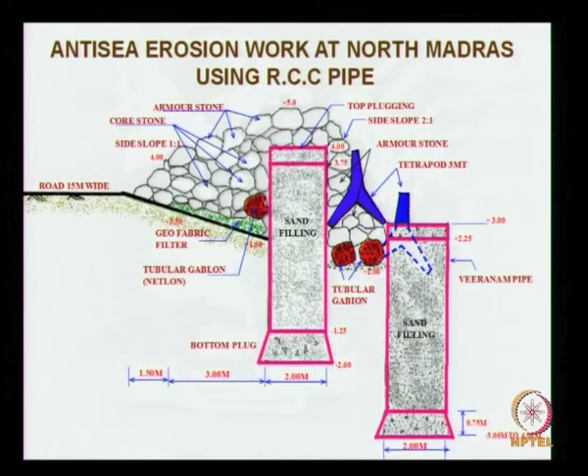This is the kind of cross section which they had adopted for coastal protection, as we discussed in the last class. These are the problems that have taken place due to the severe erosion. Look at this road, which is considered a coastal highway, that has been eroded completely, and because of this you have other problems.

I will come back later to how we restored this coastal highway. Now you see these closer views showing the status sometime around late 2000, not 2019, early 2000 I would say.

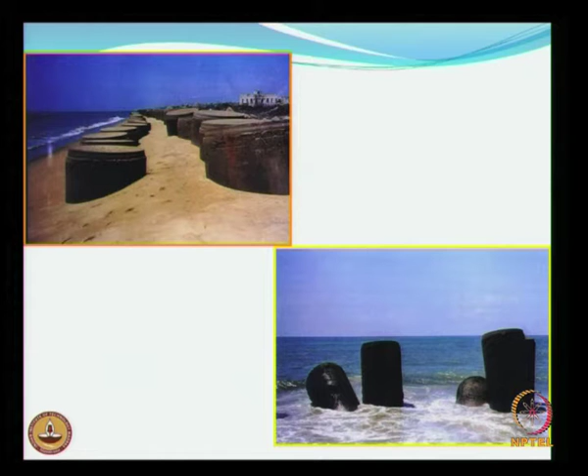This problem has been there for the last 5 decades, nearly. There have been a number of solutions, mostly piecemeal solutions here and there, just dumping of stones etc. Apart from that there were concrete pipes installed as some kind of long term solution, and also sea wall cross sections. All these things really failed.

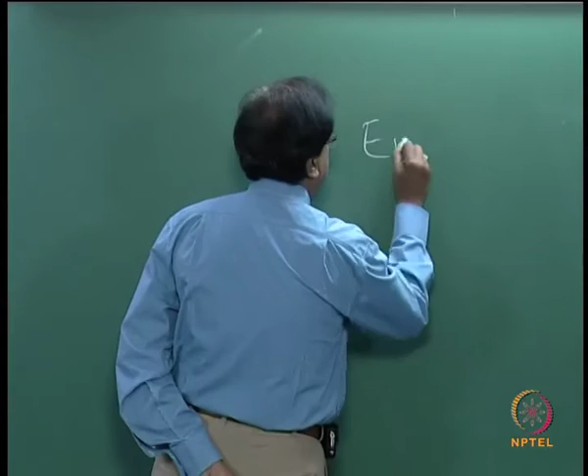This is referred to as Ennore Satellite Port, and it was located such that since it has to take some of the cargo from Chennai port, they decided it has to be as close as possible. But it cannot be very close, so the distance between these two ports is approximately 25 to 30 kilometers.

They sited this, and when they sited it, naturally if you have two ports it has to be connected properly by road, and the only possibility is to connect via the coastal highway. We will come back to this problem of siting of the Ennore port etc. later.

So what happened, this problem of coastal erosion became very important even before the port could get started. Certainly once the port comes into operation, if the connectivity is not there, reaching Ennore port also will be very difficult.

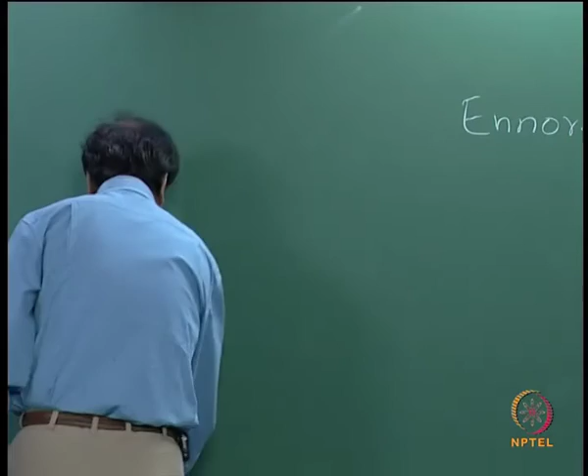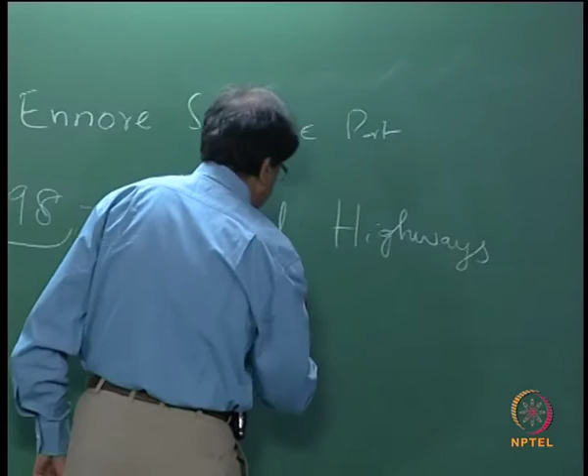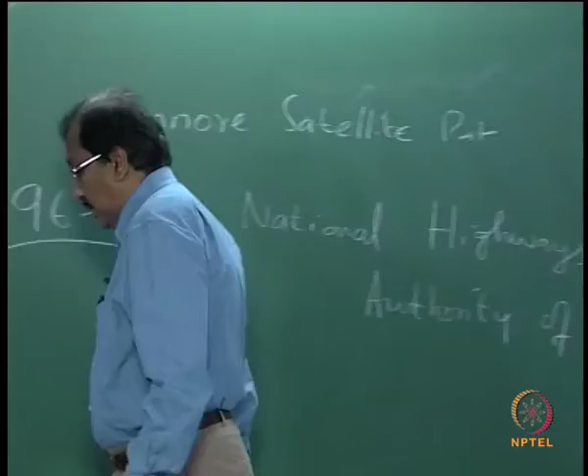So in 1998, or maybe during this time, the National Highways Authority of India referred this problem to our department. They asked us to do the survey, come out with the existing cross section, the status of the coast at that point of time, and then come out with some short term solutions as well as long term solutions.

Now what did we do? In one of the earlier slides I showed you the remains of the shipwreck. From that point we went on to do the survey, and located how much protection was needed, for example here there is not much protection needed. We identified the stretch at every 25 meters interval, surveyed the whole thing, and you see those concrete pipes all over. Here we see the concrete pipes are in horizontal position, and the chainage is also indicated.

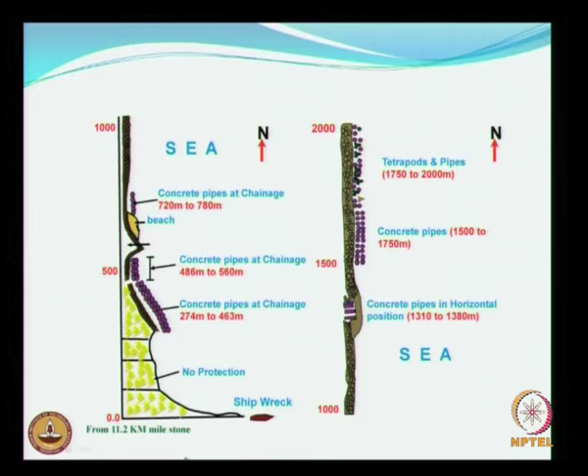So this was the status, and we had to look into the problem of what was happening. So the sea wall that was in existence at certain stretches, we suggested as an immediate step to provide an armor layer of 1.5 ton quarry stones, and as toe protection. This toe protection is very important, and this is the kind of temporary relief so that they can quickly get started with the rehabilitation of the seawall.

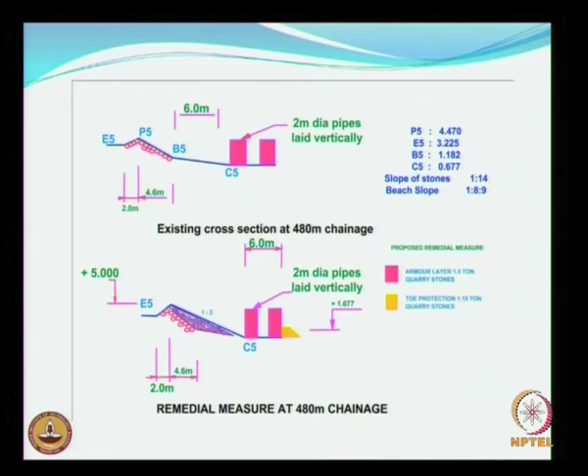At locations where the pipelines were in vertical orientation, wherever they were vertical, we could easily see a lot of scour taking place. In fact, a scour hole was there. So what we suggested is to protect the pipeline, because removing it would be very expensive. So you leave the pipeline as it is, but protect it. But that was never done, so some of those pipelines stood for some time and then collapsed.

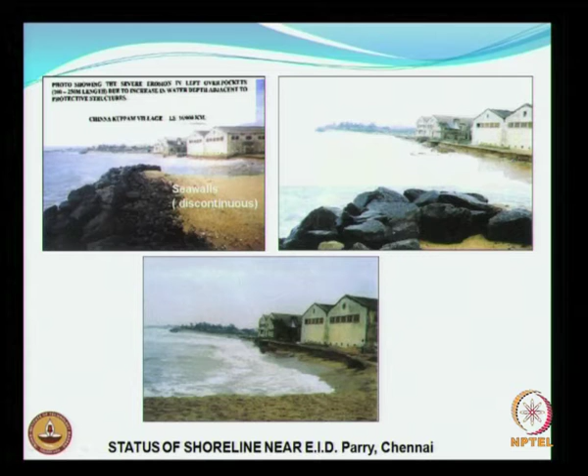So you look at these factory buildings around the same stretch. The factory buildings were also being threatened. So what we did is...

Groin field in the two stretches to be completed by May. We will come back to the groin field later. Monitoring of the shoreline, and if possible sand bypassing from Ennore port or even Chennai port, was included in the initial proposal. Then we had to finalize the orientation, length of the groins, spacing between the groins, etc., through numerical and physical model studies, as well as field studies, because we needed to gather other information about how the process is going on.

And in phase 2 we had also included some long and short groins near Ennore, as well as at the Cooum estuary, Cooum mouth. But I will talk about Cooum mouth later.

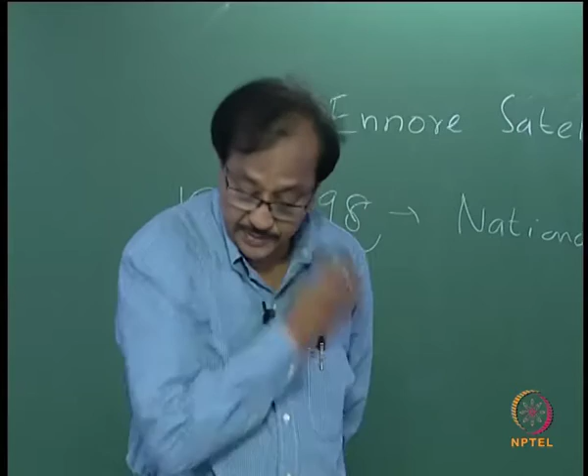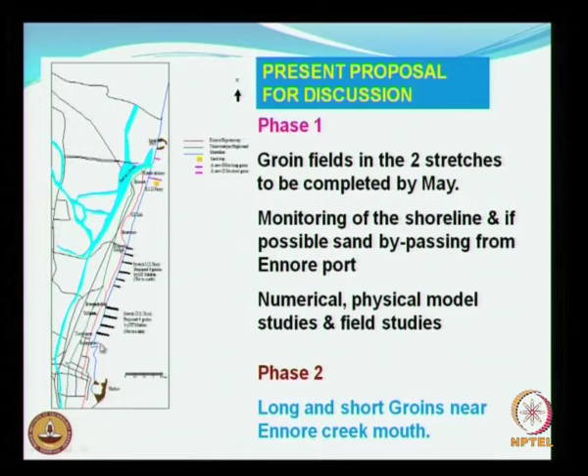So there are two stretches - this is stretch 1 and this is stretch 2. Stretch 1 was about 1.5 kilometers, wherein we had decided for this kind of groin field.

This is the final layout, but before it was decided, we had gone through several trials. When you decide for a groin field, one basic requirement is the groin should extend at least one surf width, maybe about 50-60 meters approximately. When the length of the groin is less, naturally the number of groins will increase - this is very clear.

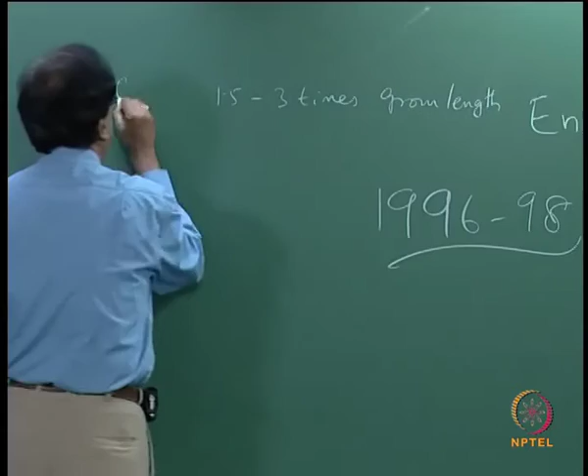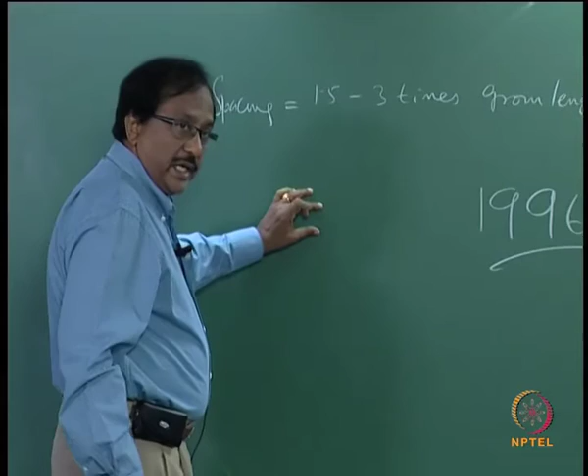So the thumb rule is 1.5 to 3 times groin length for spacing. Naturally, if you use short groins, you will have a number of groins, and if the length of the groin is small, by chance you get the filling up of the beach or advancement of the shoreline - over years this will be only up to about 60 meters.

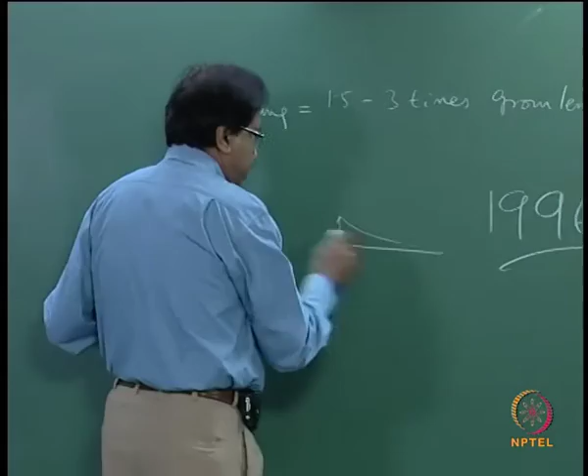But the requirement - they had a requirement that you allow as much beach to be formed as possible. So we also thought of T groins, short groins, long groins, did a lot of calculations, and finally, based on the requirement of the agency, we came out with this kind of cross section, the layout, wherein it is a transition groin, the angle should be approximately 6 degrees.

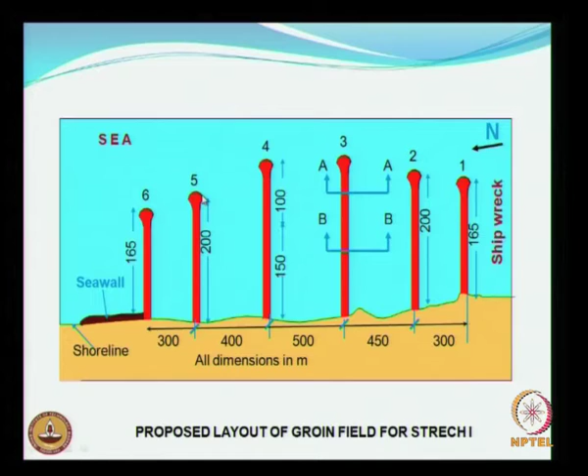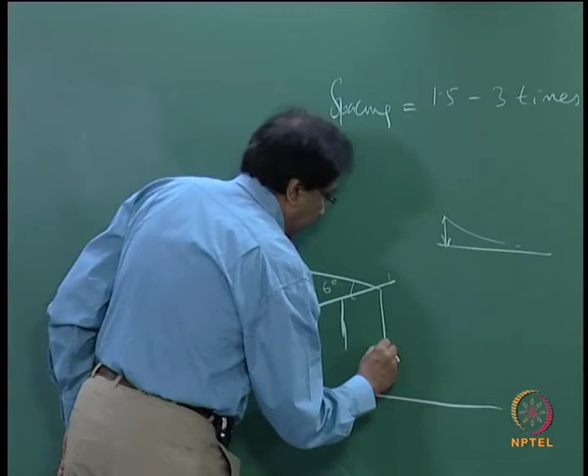So for example, if you have - so this should be approximately 6 degrees. I am talking about these groins, so this is the shoreline and this is the sea, and this angle should be approximately 6 degrees for effectiveness in retaining the sand.

So all these things were taken into account, and then the layout was finalized, but before that I will explain what other trials were also done during the course of my lecture.

Some of the information we needed was to look at how the sediment transport distribution looks like. As I said, the sediment transport is concentrated within the surf zone. So one way of doing it is to calculate the surf width, which is straightforward. How do you calculate the surf width?

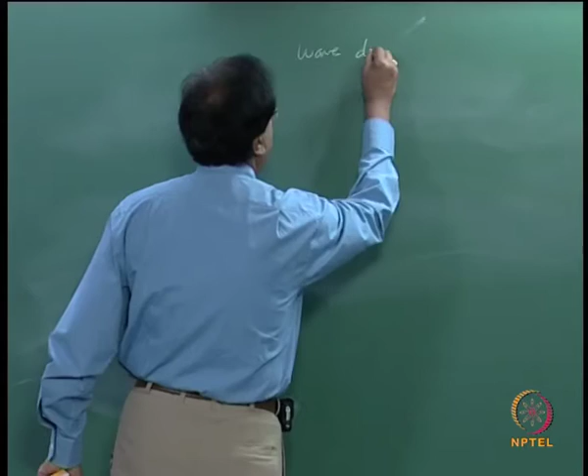What do you need? You need only the breaker depth. Look at the lecture on wave deformation, wherein we have a number of formulas for determining the breaker height or breaker depth. Once you know H naught, T, beach slope, etc., there are a combination of formulas - each formula pertains to some kind of or type of input data you have with you.

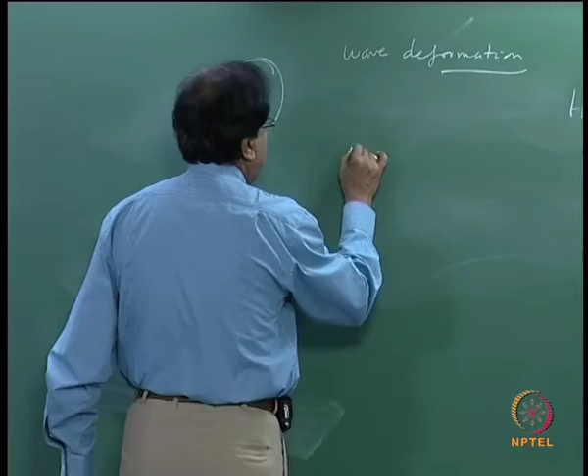So with this it is possible for us to calculate dB. Once you know dB, you can easily calculate the surf width. So beach slope is known. Once you know dB from some of these formulas, then I can get the surf width.

Is surf width a constant? No. How does it vary? Is it the sediment transport? Does it vary every day, every month, or how does it vary?

Anyone? Seasonally, because the wave heights change. No, wave heights change means mean wave heights keep on changing. No, the breaker zone, it is only a zone.

Although we call it a line, when we talk, this is the breaker line we refer to, this is the shore, and we say that this is the breaker line. Although we use that breaker line, it is not strictly a line that can be drawn along the shore, because every now and then the breaking point can change.

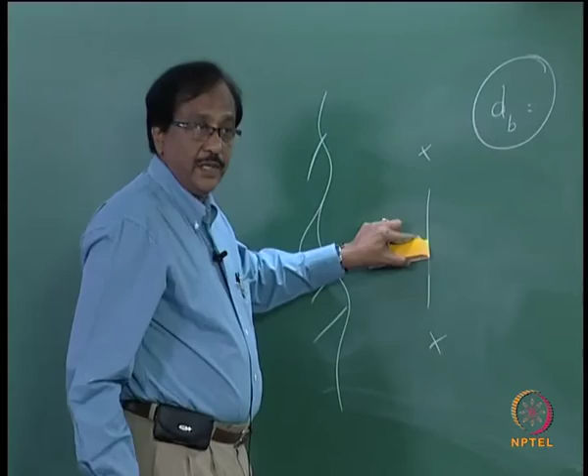But even within a day the breaker line can change, though the change will not be too appreciable within a month or within a particular season. So what you do is every month, from January to December, you can calculate and get my surf width.

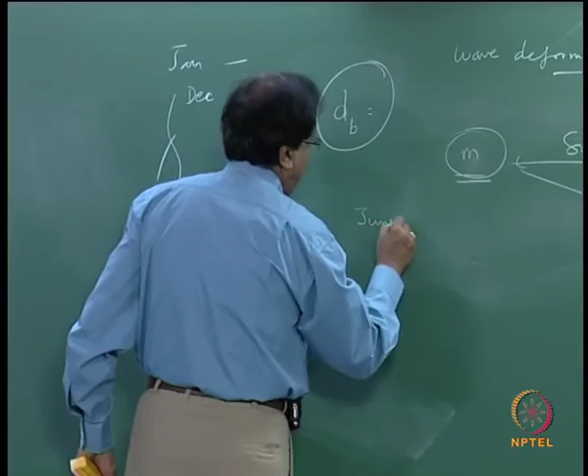But as far as design is concerned, when you want to design a groin field, you have to cater to the maximum sediment transport. So for this coast, it will be around June to August along the east coast of India, where you have maximum sediment transport.

So the surf width also will be higher. So I have determined the maximum surf width. So the groin length should definitely be greater than this maximum surf width, for the simple reason that it can retain all the sand.

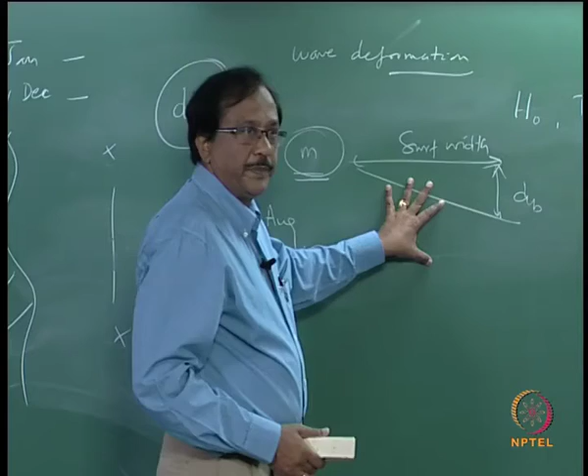That is one way of doing it. I can simply get my maximum surf width once I know the breaking wave characteristics. Based on this, the length of the groin is fixed.

The other way of doing it, you are supposed to go a bit deeper into the problem. Within the surf zone, how does the sand look like? How does the sand transport look like? What is the distribution of the sand like?

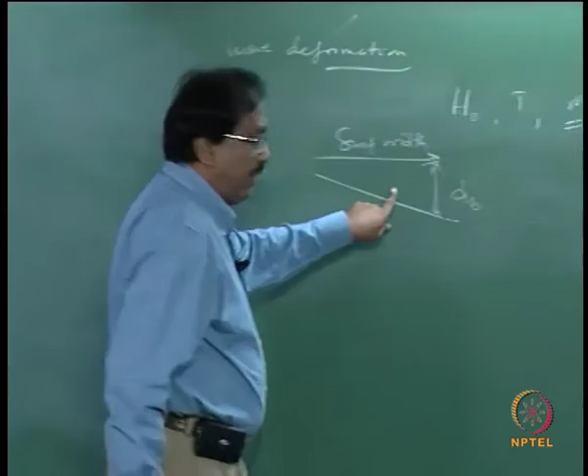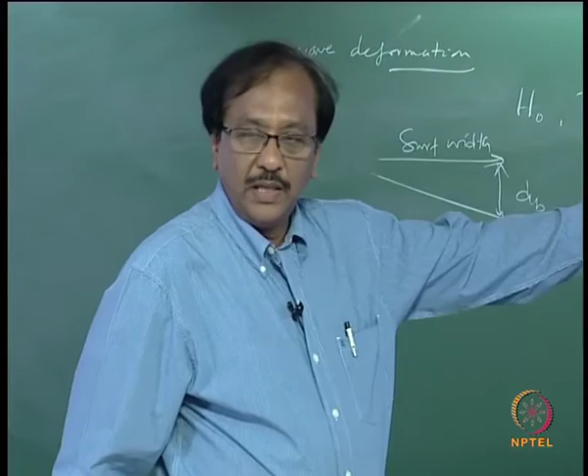So now I have oriented my lecture in such a way that you are exposed to the field problems, and after the lecture you know why you are doing it, when I take up the problem or formulas concerning sediment transport distribution or longshore sediment transport rate, etc. Instead of starting with the problem directly, I started with the actual field problems, and then I will slowly get into how to calculate all these things.

So we did the seasonal sediment transport, which gave us some indications: even up to about 200 meters we do have some amount of sand being distributed. So by having a shorter groin we will be allowing certain sand to be moved. So we wanted to be kind of greedy to trap whatever sand is moving.

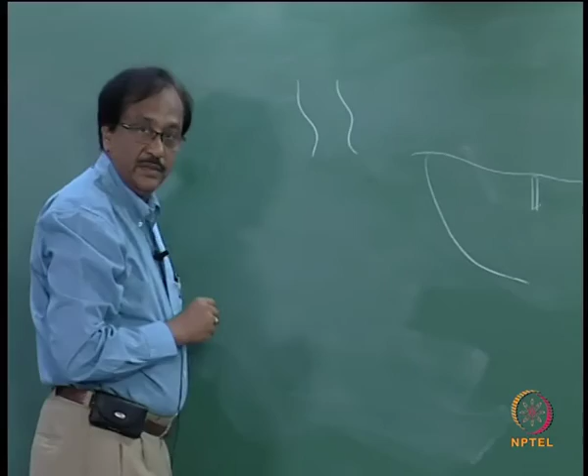But now let us come back to this problem. This is the Chennai harbour, you have the Kuam mouth, Cooum river, and the wave is moving in this direction, for which tranquility is given by this breakwater. Now I have one more river as we have seen, and another breakwater here. This is Ennur, this is Chennai.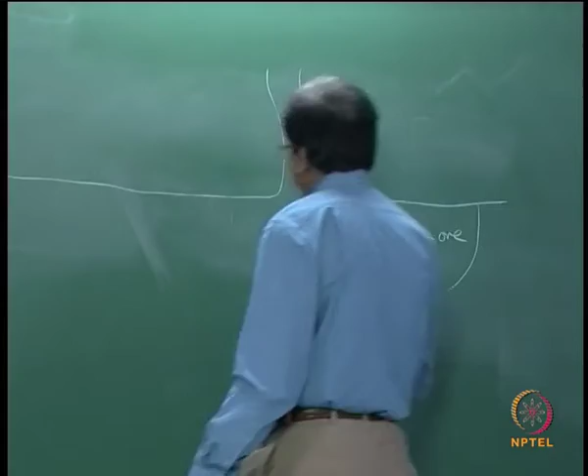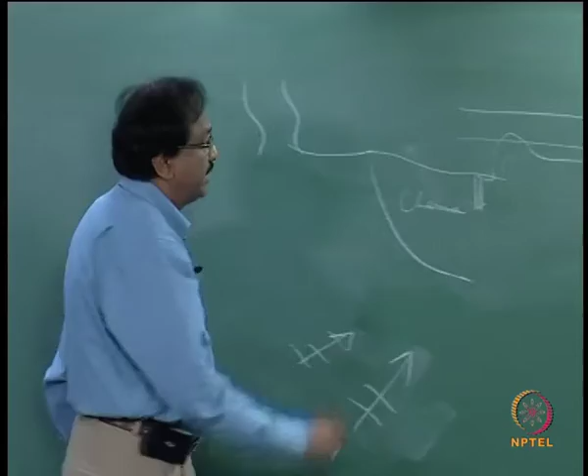How was this coast looking like? The coast was looking something like this, and the road was going something like this. So this is the road, and in fact this should go something like this.

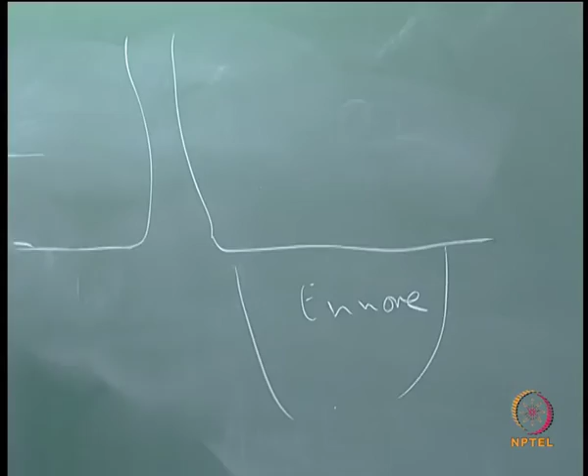So now the suggestion was to have a groin field here. When this proposal was made, arriving at the solution and proving its validity was much easier than convincing the authorities and other experts.

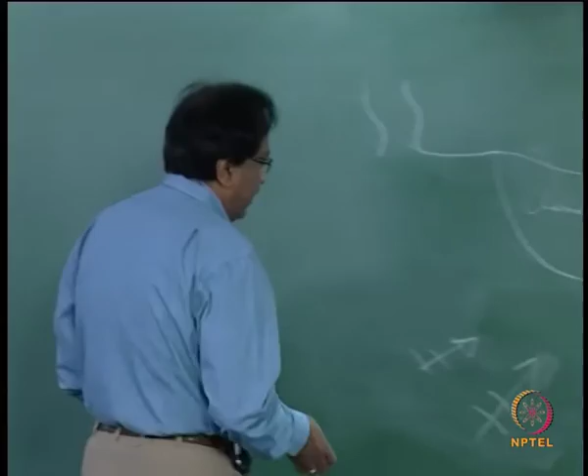The simple problem is why there was objection. When the sand is moving in this direction, most of the sand is trapped here, and this is also an eroding area, and the sand is already moving from here. And when you want to have groins, where do you get the sand from?

So the doubt raised was, is it reasonable or not? It was quite reasonable, right? So where are you going to get the sand? So this problem was raised all over.

Although we came up with the solution in 1997, I would guess, the project had to wait for about 6-7 years to get implemented, because this is an important location and a huge amount of money is also involved.

But then what was the kind of question posed by us? We said that this is stopped, okay, but still the process of the waves, the oblique wave attack, is going to continue here, and this is certainly going to have longshore currents.

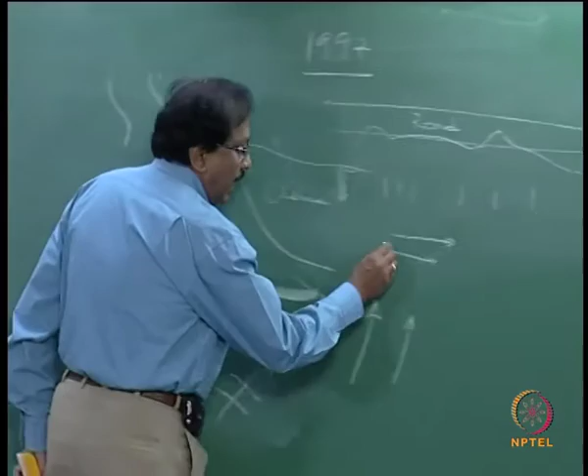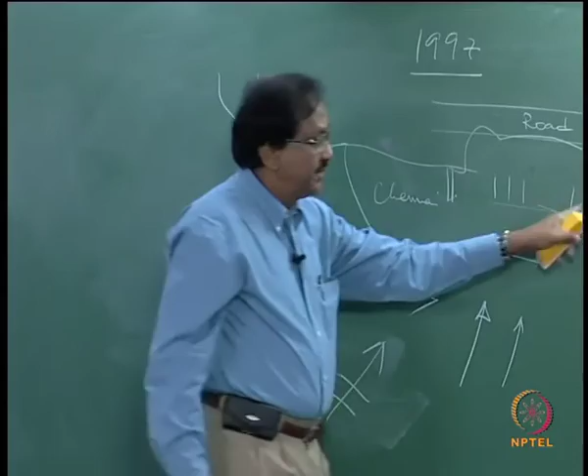And it is going to take the sand. If you do not have these compartments to intercept the free movement of sand, the sand certainly will go there. The sand that is likely to go there, only that sand is being trapped in between these groins, but still the sand beyond this groin area will still have its path to move into this area and create problems here.

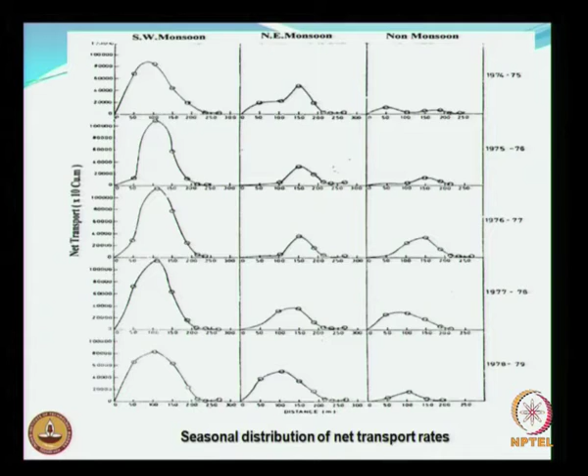Okay, so this was an interesting problem, so we could do that, and then we could convince the authorities, and finally we will see the results later. When we started the work, we tried T groins. T groins, you know why T groins are suggested. T groins are to retain the sand when it is trying to be brought or trying to be taken away into the ocean during the downwash.

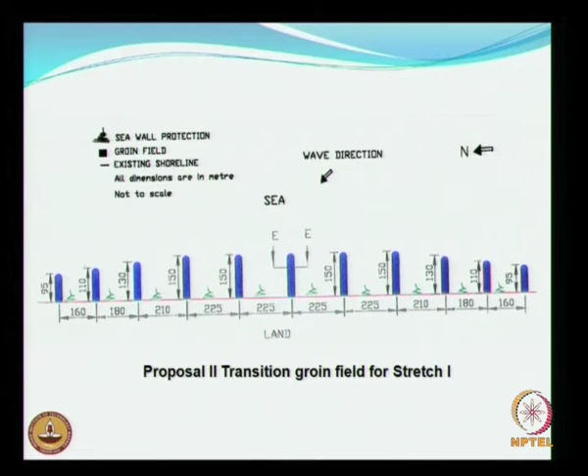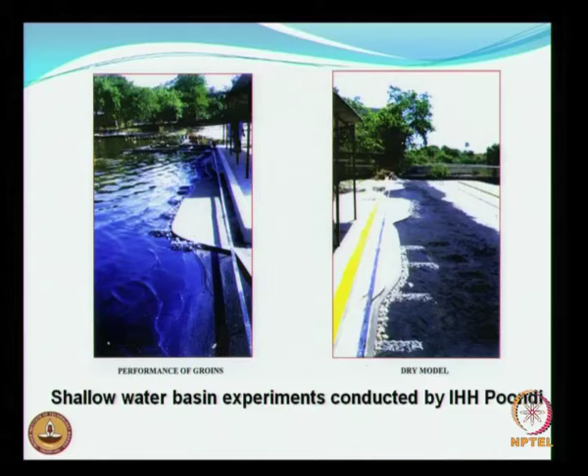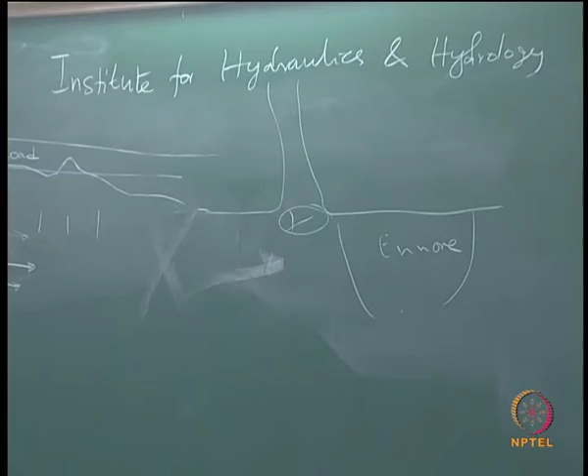So then finally we did, this is a very old project wherein we did the numerical simulation of the shoreline evolution. We have now a better way of projecting all these things, and then we also did the experiments at the Institute for Hydraulics and Hydrology. There is one institute which is about 1.5 hours' drive from our institute. So they have a shallow water basin wherein we simulated all these informations into the wave basin.

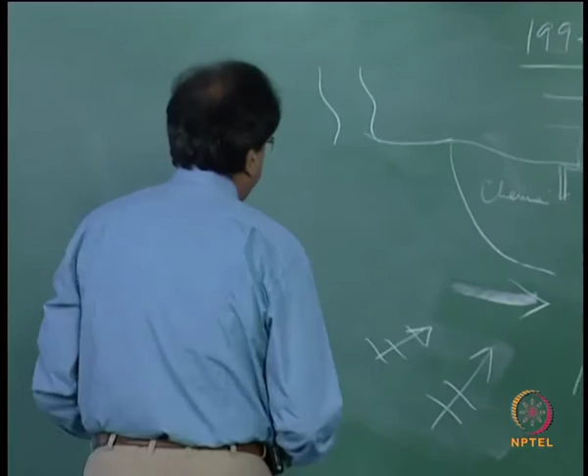And we tried, an attempt was made to consider a mobile bed, that is the sand was also used. Okay, although it cannot be said that we could achieve 1:1 correspondence between the field and the lab, at least we could make some progress in that direction, and that gave us great confidence that the system is going to work.

So, after convincing all the authorities, groin field for stretch 1 started sometime in April 2004, I would guess. So in April 2004 the construction sequence also was given.

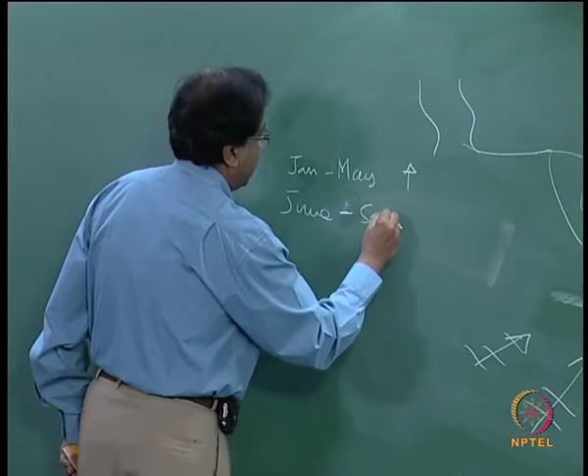Please recollect that the sand movement is: during January to May it is moving towards north, June to September it moves towards north, and October to December it moves south.

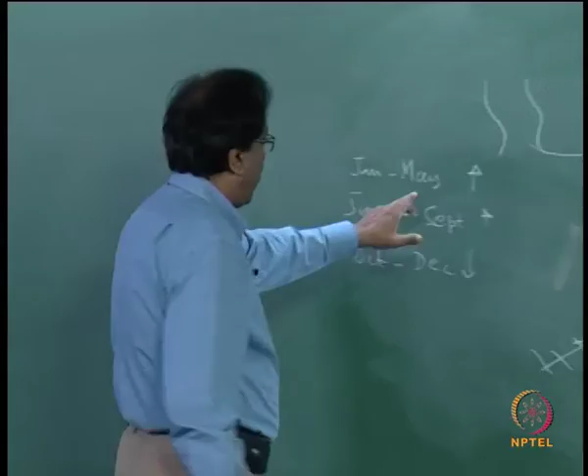How do you know all these things about the direction as well as the quantity? That will work out as a problem later. By then you would know why you are doing all these problems. Is that clear?

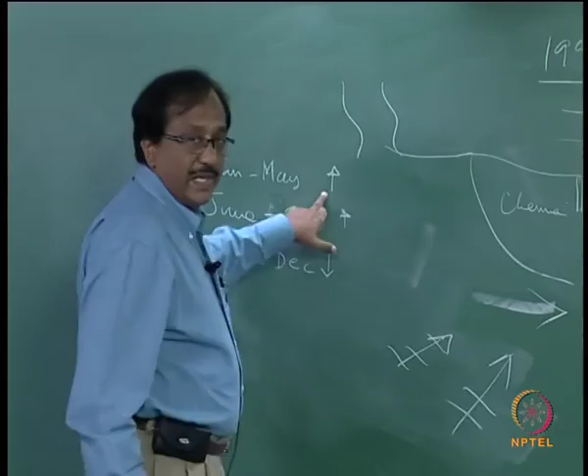So now, the project started in the month of April. When they want to do the project in the month of April, which is the groin you would suggest to be constructed first out of these 6 groins?

Make a guess, at least with whatever knowledge you have gained, just think and tell me. Groin 6, because I have already indicated here, or I have already told. Now the question is, instead of constructing groin 6, what would have happened if I had constructed groin 1? The erosion will take place on the northern side. So what we had suggested is, you construct this groin first and then slowly go ahead with other groins.

But while doing it, make sure that this is properly protected by a seawall. There was a seawall which was in existence, but that had to be modified so as to take care of the action of waves. You understood? So the seawall was first strengthened and then this was constructed. As far as coastal engineering is concerned, the sequence of construction is extremely important.

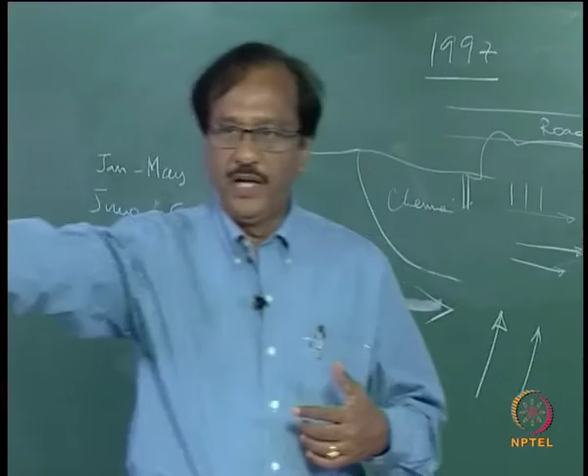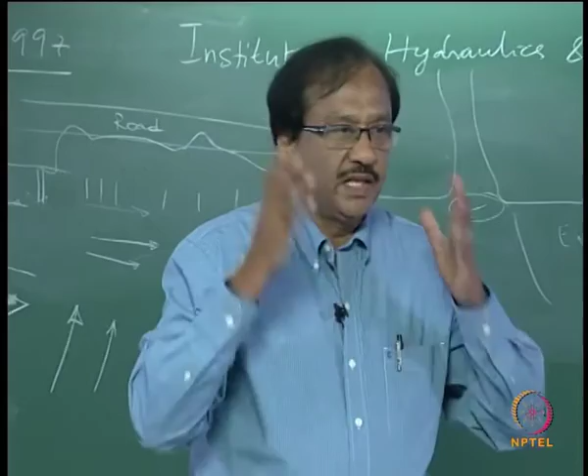And if someone comes and tells that my numerical model is like this and my field is behaving like this in coastal engineering, and what is the deviation, if he says the deviation is less than 5%, it is quite hard to believe. If someone says that it is less than 20%, I would gladly accept. You understood? So even getting up to a deviation of 20% is not so easy, because there are so many ifs and buts.

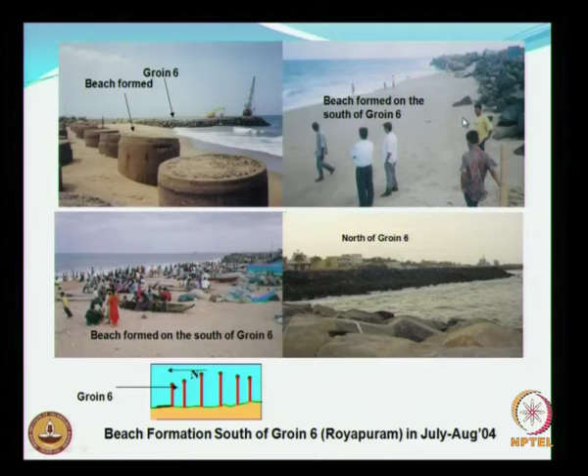Is that clear? So now you see what has happened to all this beach formation. So, any coastal engineering project of this nature, continuous monitoring is extremely important.

I am sure some of you might be joining some consultancy firm or maybe some firm involved in construction, etc. All these things you have to keep in mind.

These are some of the issues being faced by some industries working in this area.

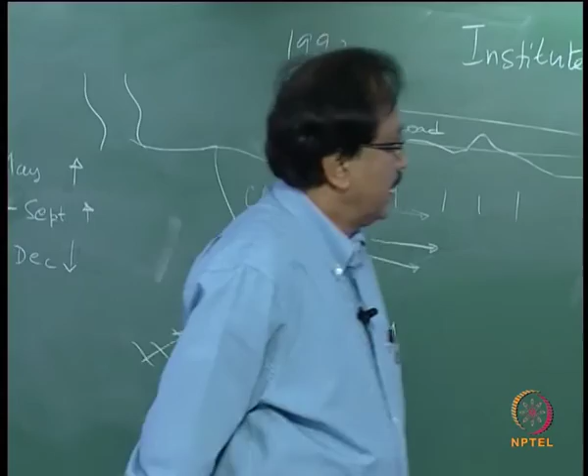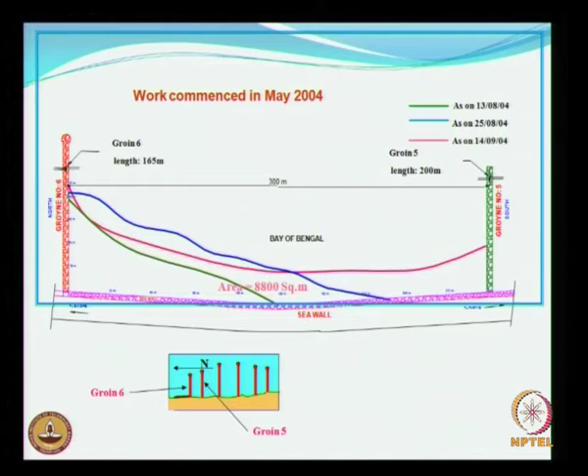But by 6th January 2005, around 9,000 square meters was reduced by about 50%, so 50% of the beach that was found went into the ocean.

Can you guess why? Reduction of littoral. Huh? Change in reduction of littoral. Can anyone?

What happened in 2004? So last week of December 2004 we had the tsunami, and one of the devastating effects was to remove the beautifully formed beach.

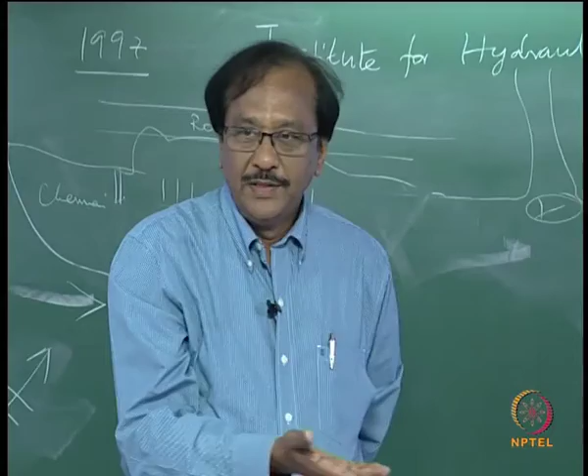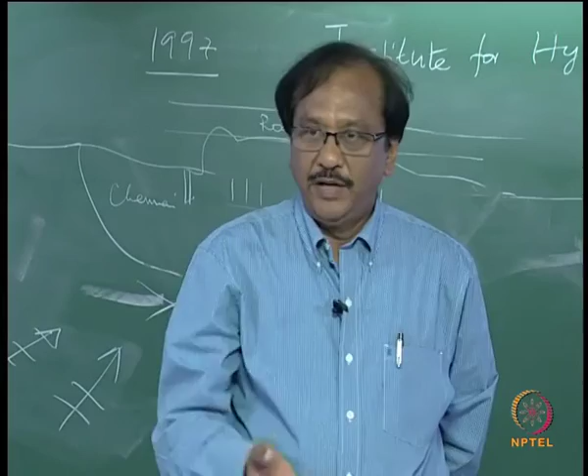That was really disgusting, because we were so happy with the solution being worked out, getting fruitful results after 5 decades. The beach was being formed, the local people were very happy, and we as consultants were also very happy. Suddenly, within a matter of 6 months from implementation, the sand had gone inside.

That resulted in some kind of frustration, but then we continued monitoring the shoreline, and we saw that whatever went inside the ocean had come back with an additional 1000 square meters.

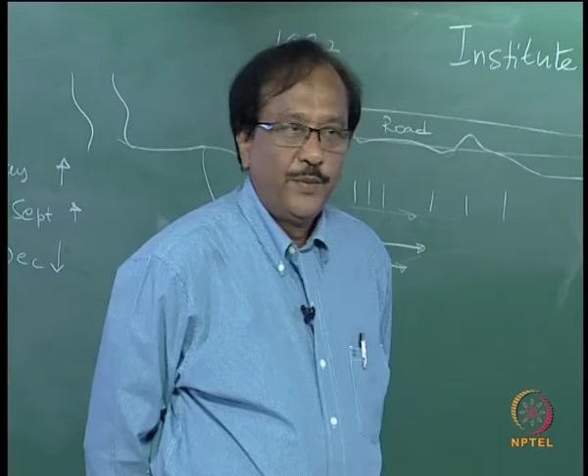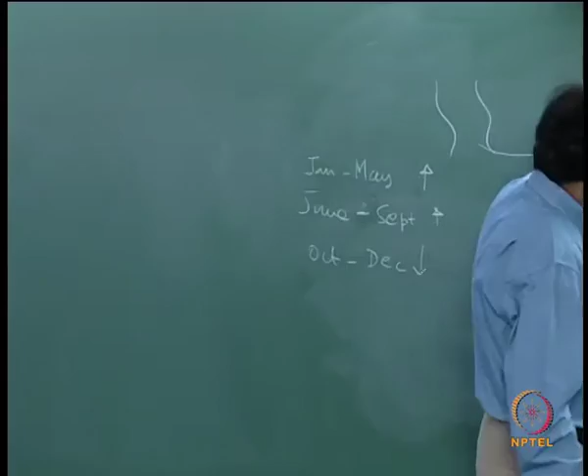What happened? The sand which was removed from here, somewhere here, must have got deposited here.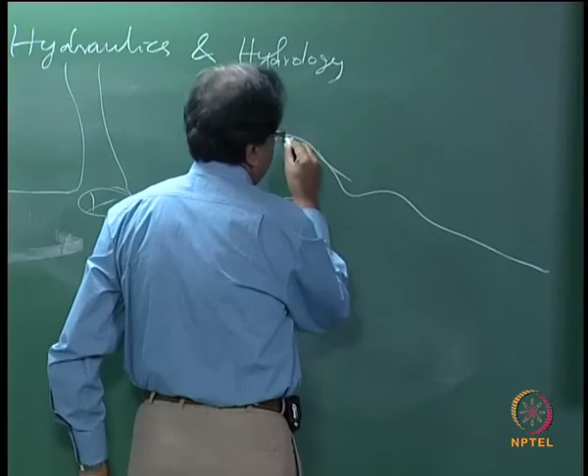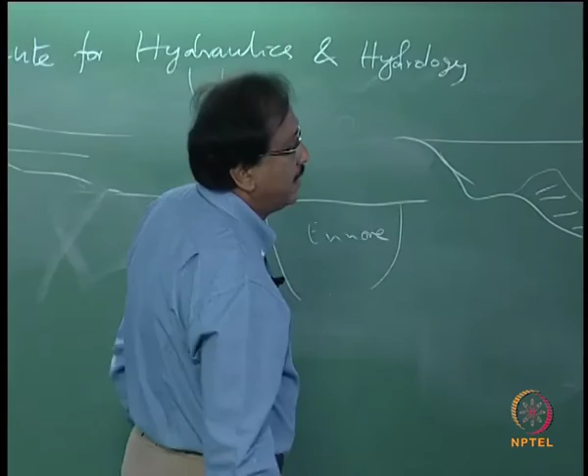So when I draw here, all the sand might have formed here, and then over time - not slowly, actually quite fast - within a few weeks the water level must have gone down, and this bar has been removed and redeposited here.

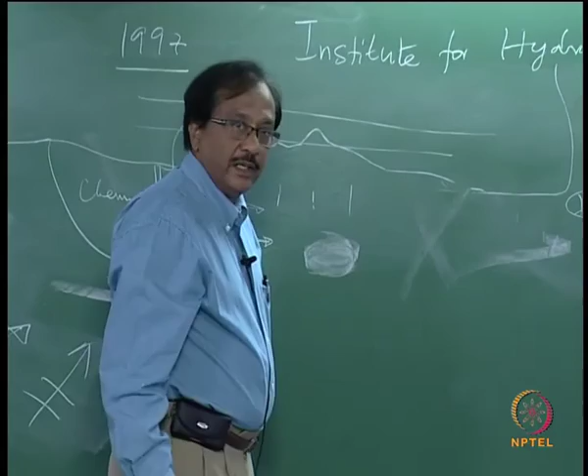Now the beach is intact, as of today. The groin field has been quite effective, as of today, March 2012.

The only thing is, care has to be taken for continuous rehabilitation of the groins, because these groins are formed only by dumping of stones. So you need to monitor and keep rehabilitating if it suffers any kind of damage.

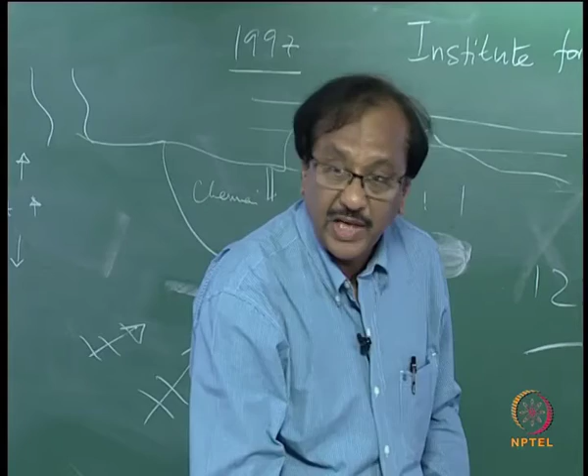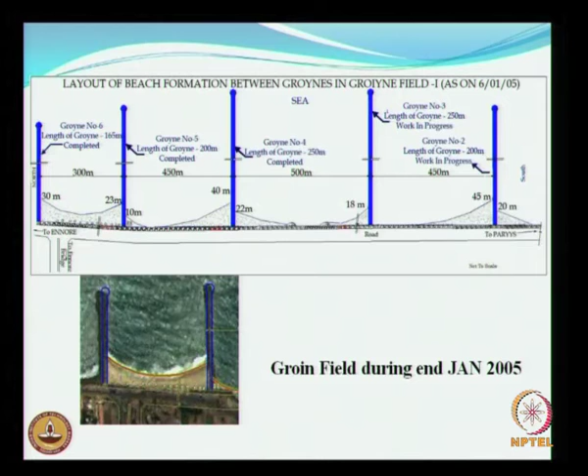Some of the monitoring information - we also looked at the satellite imageries and tried to understand using GIS as a tool in order to quantify all these things. And there is another satellite imagery.

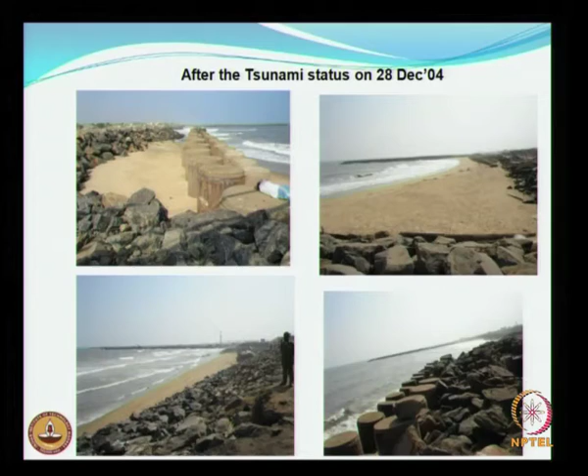This is a closer view of the beach formation between the groins taken in January 2005, and after the tsunami, on 28th of December, some of the locations still had sand. The tsunami did not remove the entire sand; in some locations the sand was there, and the groins really sustained the tsunami because there wasn't much problem with them.

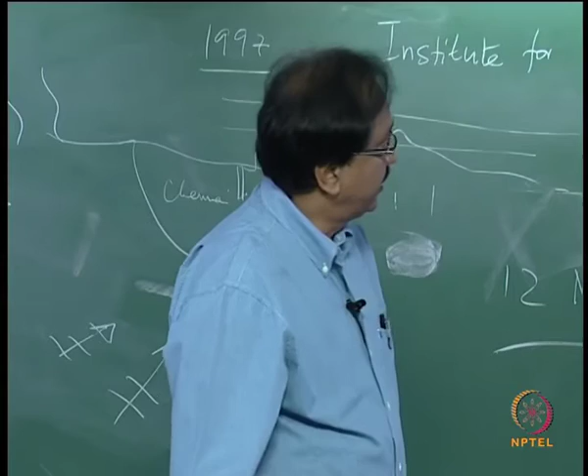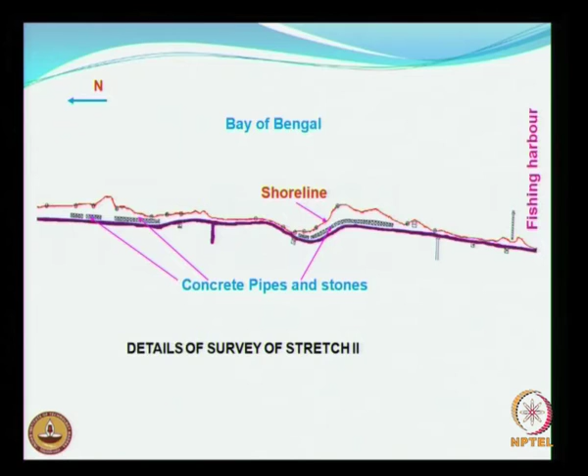Details of stretch 2 - there were 2 stretches. For stretch 2, this was the kind of cross section we had, because the cut was quite deep there. So we wanted more beach formation, which is why the length of the groins is quite more.

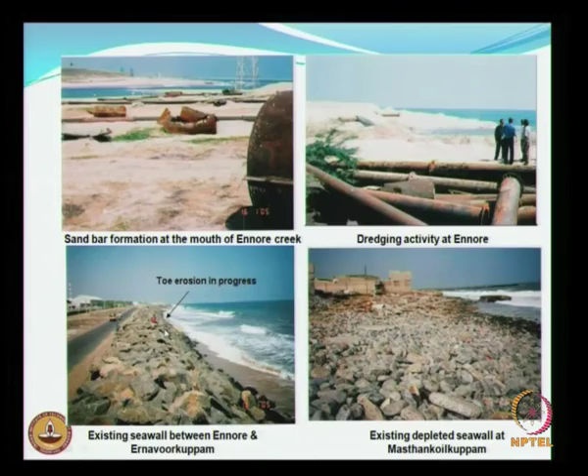Some of the other problems include the river mouth closer by, sandbar formation, etc., around the same stretch of area. See how the seawall has failed - look at this, the toe erosion starts. Once toe erosion starts, that's a problem, and it continues until the stability of the stones becomes questionable and the whole thing collapses.

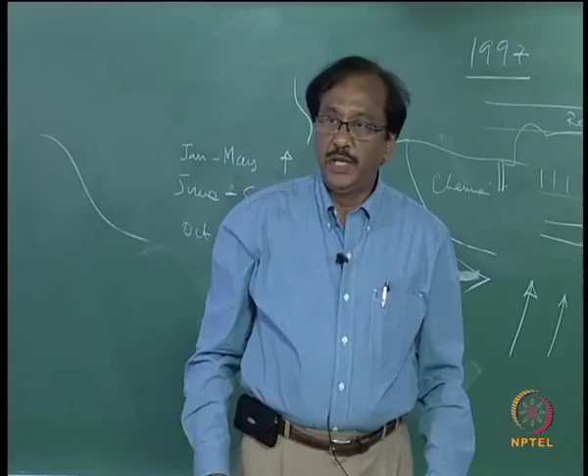So we looked at the seawall cross sections. What we had adopted for some of these stretches is shown here. I will discuss the others - because of the tsunami we raised the top level of the seawall. I'll discuss more in detail, but we provided a strong toe, and we used geosynthetic textiles, etc.

I'll come back to this later, but you remember groin 6, we had a cross section here for the seawall. That seawall was redesigned as shown here - we had a flat slope, because normally the slope of the seawall is around 1:2.

Flatter the seawall, the more advantageous it is, because if it is flatter you can use smaller size stones. So we adopted a flatter slope, and proposed strengthening using armor stones, about 75% greater than around 1.5 tons. So mostly the stones will be about 1.5 tons, with a percentage around 1 to 2 tons, and 75% of the stones greater than 1.5 tons.

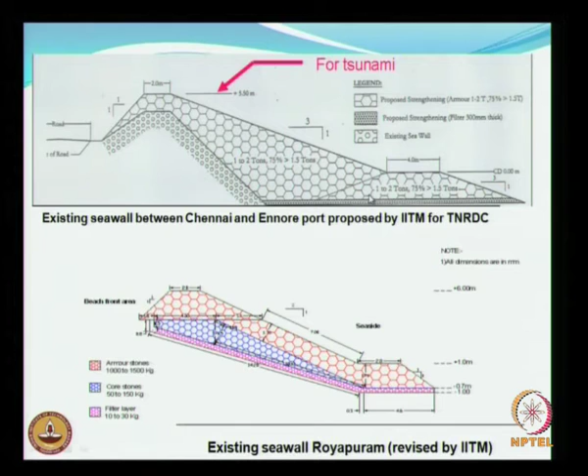This is the specification we gave, which they have strictly followed, and this seawall is really intact, there is absolutely no problem. In fact we gave 2 cross sections to be adopted at 2 different locations. All this information is shown in this figure. Now comes the effect of...

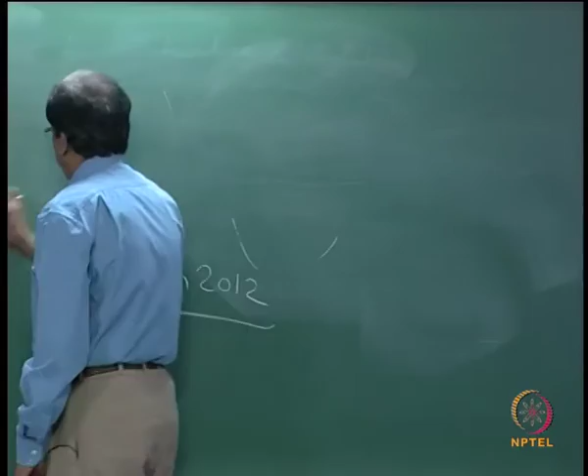Are there any questions so far? I would be very happy to answer if you have any. If you do not have any questions, I assume everything has been clarified. Any doubts, any of you? Vinay?

Okay, this is a scenario - the effect of Ennore satellite port. Now, what was the lesson we learnt from construction of Chennai Harbour? This was formerly called Madras Harbour, now it is Chennai Harbour.

What was happening there? What did we understand from the construction of Chennai Harbour - what was the negative and positive impact? The positive impact is okay, but what we are worried about is the negative impact: closing of the river Cooum here, and erosion here. Now you have another creek here, the Ennore Creek, and we have gone for another port here. The same problem is being duplicated.

Okay, what are your suggestions? We want a harbour there. I want to hear from you - we need a harbour somewhere here. First of all, you understood, by having this Ennore satellite port, the problem we had faced is going to repeat.

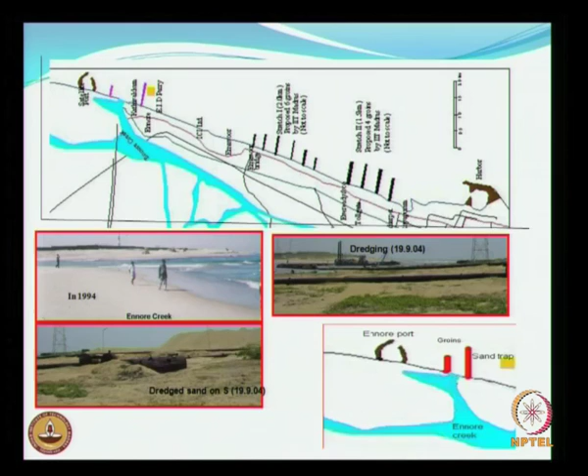So with this I will complete today, and we will continue in the next class.